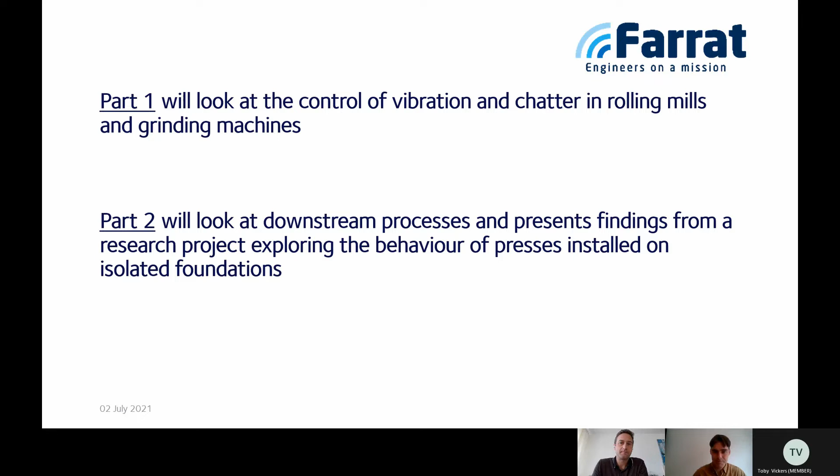So part one, control of vibration and chatter in rolling mills and grinding machines. First of all, what is chatter?

Chatter is marks on the metal strip that comes out of rolling mills. This can be visible to the naked eye, but it can also be invisible, and it can show up further down the process, causing issues with quality, especially at paint application. This can happen in industries such as automotive and aerospace, but also in canning, and it can result in rejection of strip and loss of profits.

Some mill vibrations can also cause gauge variation on the strip. This is where there's varying thickness along the strip, and this can also cause quality issues and rejections. We'll talk a little bit more later on about gauge variation.

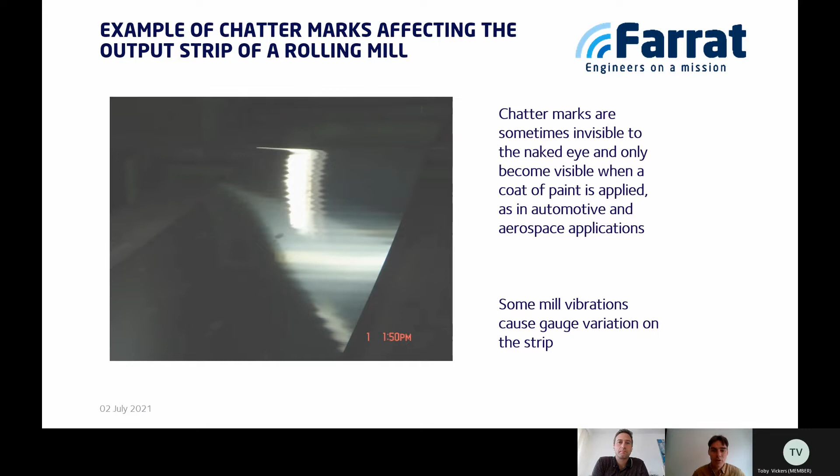There's essentially two vibration modes which can affect the mill: third octave resonance and fifth octave resonance. Third octave resonance is audible, and this can cause gauge variation on the strip. This is when the work rolls move into and out of the strip, causing a varying thickness. We call this gauge variation, and this causes quality issues and ultimately rejection of the roll.

And then you have fifth octave resonance. This causes backup roll marking, which can later print onto the strip. This is when work rolls move into and out of the backup rolls, causing marking or chatter on the backup rolls. This chatter then prints down through the work rolls onto the strip, causing chatter on the strip.

The question then is, what's the difference between the two modes? What causes them, and what can we do to resolve them? We'll talk about that now.

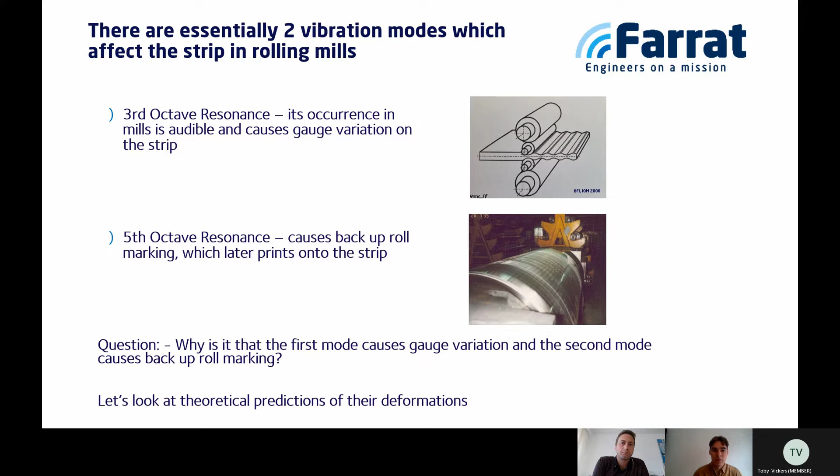You then have the first mode of vibration. This happens at around 70 Hertz. In this mode, all of the rolls, the backup and the work rolls, are moving in sync, up and down together at the same time. So there is movement of the rolls, but there's no relative movement. This means the backup rolls aren't being pressed into, and there's no relative movement between the work rolls either, so there's no gauge variation on the strip. So again, this mode's fine.

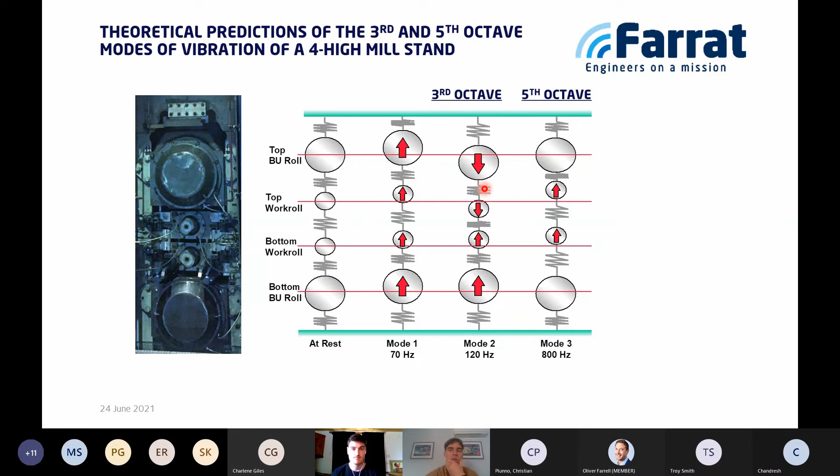So as we said, third octave mode of vibration causes gauge variation, because the work rolls are moving in antiphase, creating a thickness difference at different parts along the strip as it moves in and out. The frequency of the third octave mode is largely independent of speed - it's a structural issue, usually around 120 or 140 Hertz. Because it's a structural issue, it's also not usually related to forced vibrations - not a result of a gear or bearing, but a structural problem with the machine that's excited whenever it's running.

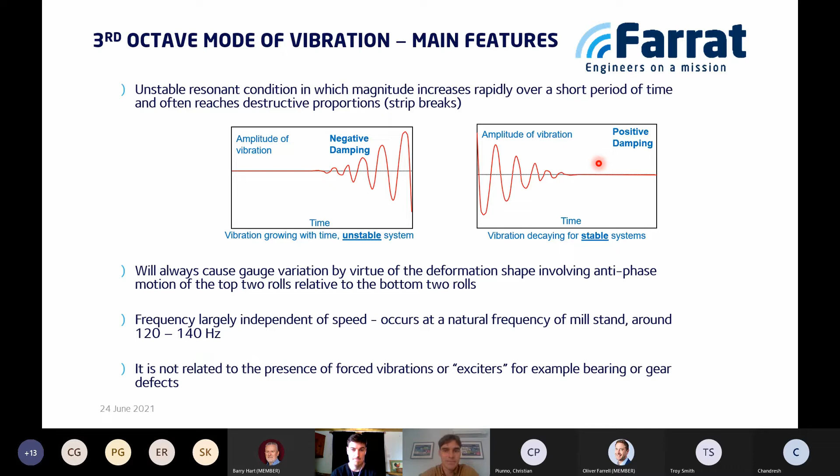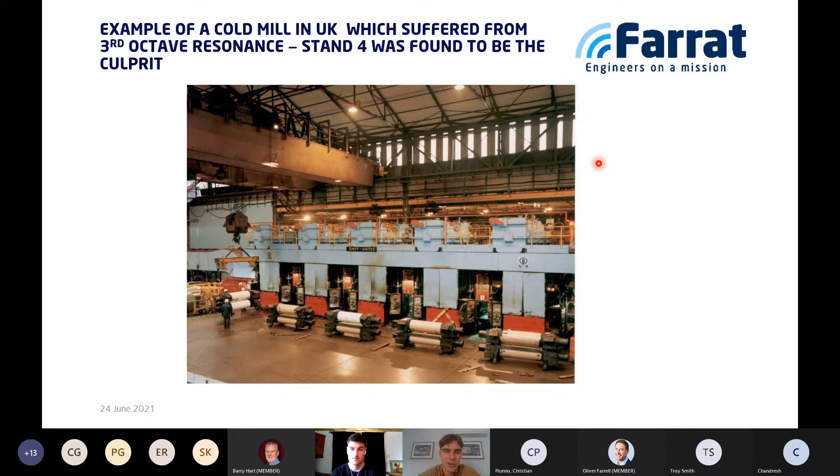An example of this is a cold mill in the UK. This was a 5-stand mill, and on stand number 4 there was a structural weakness. There was movement in the rolls and in the chocks, and this was causing gauge variation on the strip.

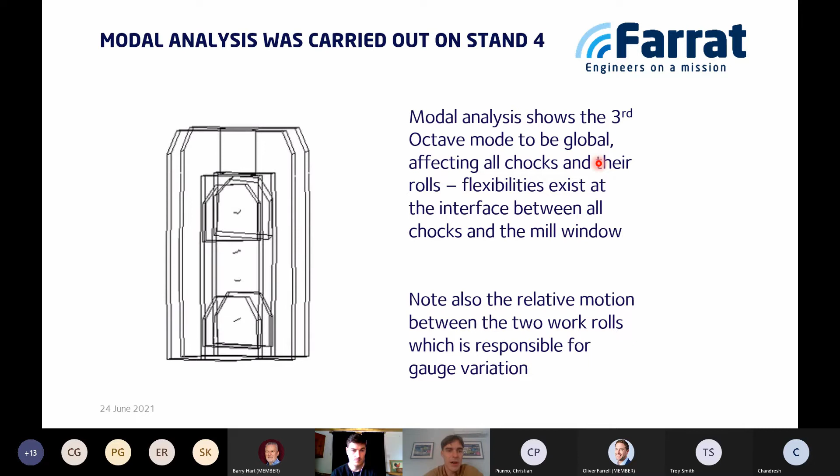We've got an animation here on the left-hand side. You can see the work rolls, which are the two lines in the center, and the backup rolls, the two lines at the top. They're moving together in and out, you could say panting. As this happens, the strip passes through and the thickness varies along it. You can also see there's flexibility between the chock and the mill window, which is what's causing the movement. This was carried out using modal analysis, which is what allowed us to view this animation - I'll talk more later about what modal analysis is and how it's carried out. But we can see clearly from this representation that there's a lot of looseness in the machine.

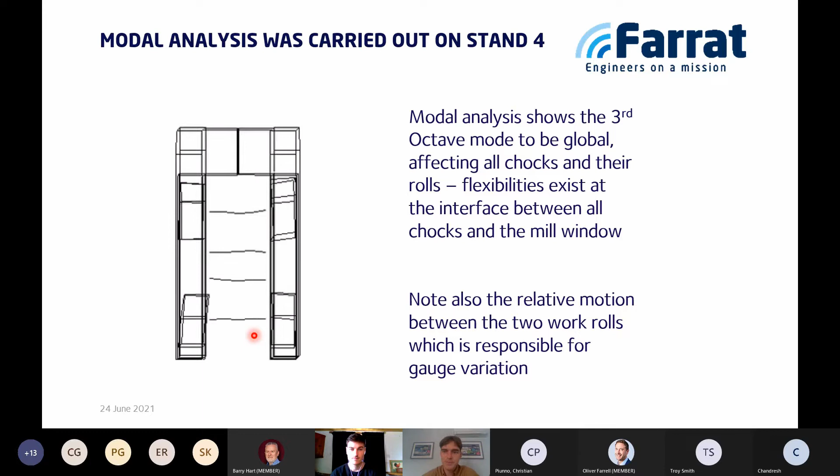Here's another example - a more localized third octave resonance. In this case, the bottom backup chock was moving around inside the mill frame. When this happens, it causes relative movement of the two sets of rolls, and again gauge variation in the strip. To fix this, the excess clearance levels had to be restored to their original specifications. We were able to identify this was happening through modal analysis, which I'll talk about in more detail later.

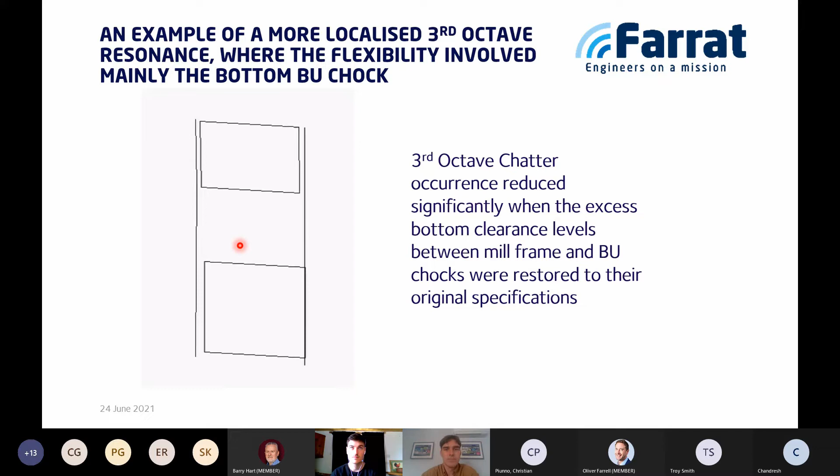So that's how we can identify third octave chatter. I'll talk now briefly about what can be done to solve it. The first thing is to use a vibration monitoring system for early detection of chatter and to automatically slow down the mill. With an accelerometer on the mill, you can measure vibration levels, and the operator can see this in real time and use these measurements to avoid speeds which excite the third octave resonance. As well as that, we can use modal analysis, which, as we just saw, allows us to see where there's looseness in the machine, excess tolerances, etc. If we know that, we can reduce clearances and add stiffness and damping to fix it.

Another thing we can do is add passive dampers. For example, a tuned mass damper could be added to the backup chocks - I'll show an example of that in the next slide - or it can also be added to the mill frame.

Process parameters can also affect the third octave resonance. For example, if there's not proper lubrication at the roll bite, the levels can be changed to get proper lubrication, and this should improve the damping characteristics of the machine.

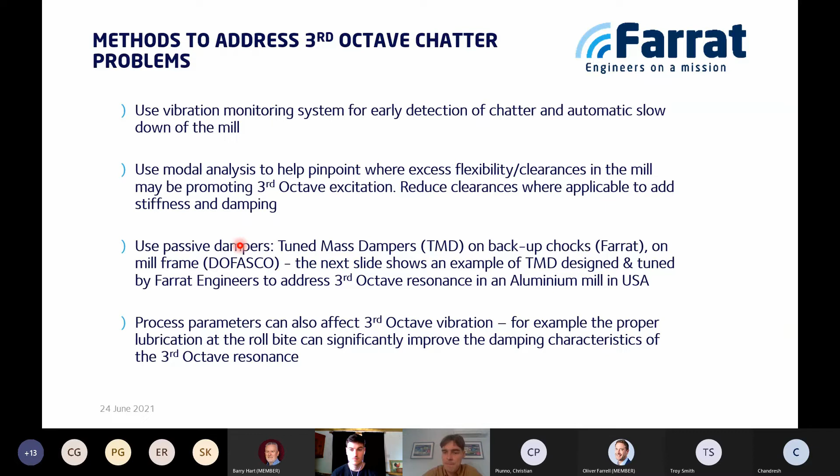So this is an example here. This is a tuned mass damper that's been fitted to a backup chock on stand 2 and stand 3 of a tandem mill. Once this was fitted, there was a significant improvement in the mill performance.

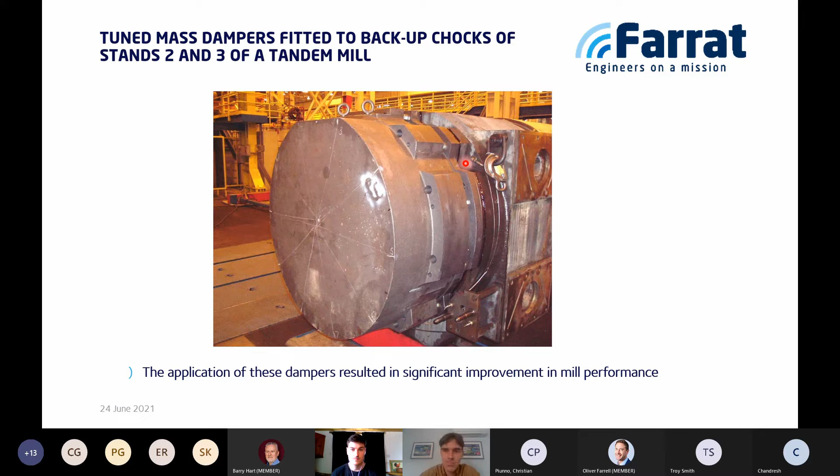So that was third octave resonance. I'll talk now a bit more about fifth octave resonance. As opposed to third octave resonance, which is unstable, fifth octave resonance is stable. This means the vibration magnitude remains constant for given operating conditions, but is amplified by the speed. So whenever the operating speed of the machine coincides with the fifth octave resonance, there's higher amplitude vibrations.

As we saw before, in this case, the backup rolls are inert, they don't move, but the work rolls move up and down in sync, causing marking on the backup rolls. This marking can mean the backup rolls need to be replaced much more quickly, so there's a reduced campaign duration. And if the marked backup rolls are left in the mill, it can cause chatter marks in the strip as it presses down through the work roll and onto the strip. This can lead to quality issues and can often lead to rejection of the strip by the customer.

Fifth octave vibration is always a result of exciters. That could be a gear, a bearing, a coupling, or it could be strip coming into the mill that's already been marked by a process upstream. The most common cause of fifth octave vibration is chatter on the rolls from the grinding machine, put on before it's actually got to the mill. I'll talk about that in more detail later on and about what can be done on the grinding machine to help mitigate this.

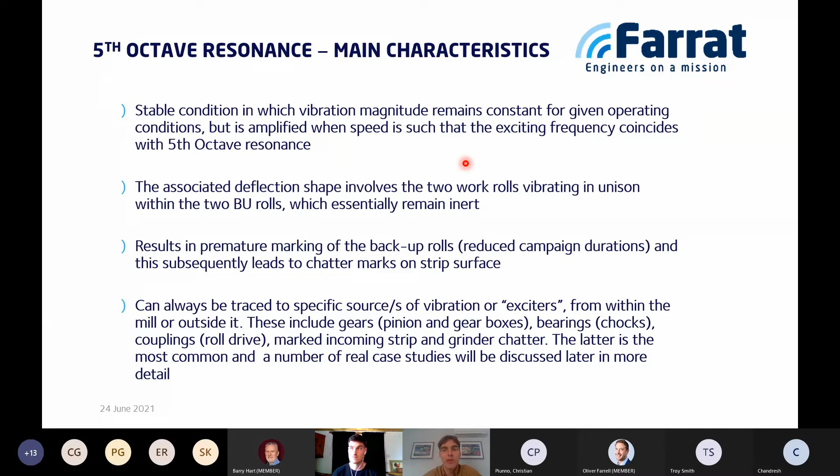So this is an example of fifth octave resonance. In this diagram, you can see the solid lines are the initial position of the mill. Here are the chocks for the backup rolls, the work rolls. Here's the backup rolls themselves, and in the center, you've got the work rolls. The solid lines represent the original position, and the dashed lines represent the deformed shape.

You can see that for the backup rolls, there's very little difference between the dashed lines and the solid line. In fact, they're pretty much in the same place. But for the work rolls, the dashed line has moved significantly up from the solid line originally. So the work rolls are both moving, the backup rolls are staying still. The work rolls are moving up to and out of both of the rolls, causing marking on the backup rolls. You can see actually on the bottom work roll, there's slightly more movement than on the top work roll. However, they're both still moving, so it's still going to cause issues on the backup rolls.

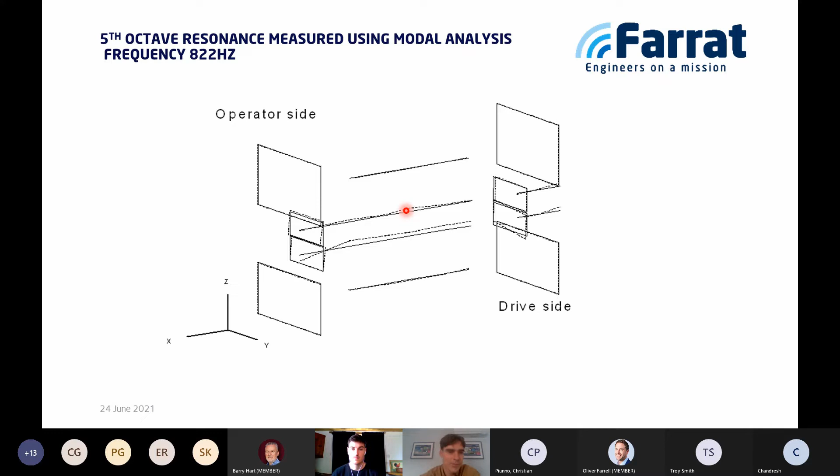We've got an animation here of this as well. You can see here that the work rolls are moving quite significantly. The work roll chocks are moving slightly as well, and they're moving up to, in and out of both of the backup rolls.

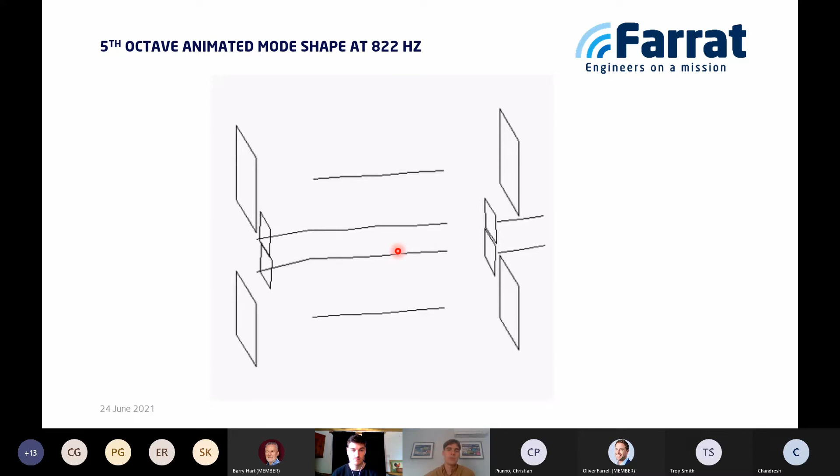So that's fifth octave vibration. That's what it does, that's how it works. How do we solve it? We can use vibration analysis techniques to identify the sources of forced vibration.

What this means is we can carry out instrumented hammer tests on the mill to get a frequency spectrum. We can use accelerometers on the mill while it's operating to see where the high amplitude vibrations are. So if we can see a high amplitude vibration at a certain frequency, we can figure out maybe this is due to a bearing, or maybe it's related to a coupling, or maybe it's related to a gear. And then once we know what the source is, or have an idea what the source is, we can replace it, or we can run at speeds that don't excite that source.

There's a number of different things we can do once we've identified what the source of the forced vibration is.

We can also use modal analysis to identify where excess clearances or lack of stiffness may be making the resonant behavior worse. I'll discuss in more detail later what modal analysis is, but it essentially allows us to see the shape of the machine as it's deforming, so where there's looseness, where things could be tighter, where there's excess clearances.

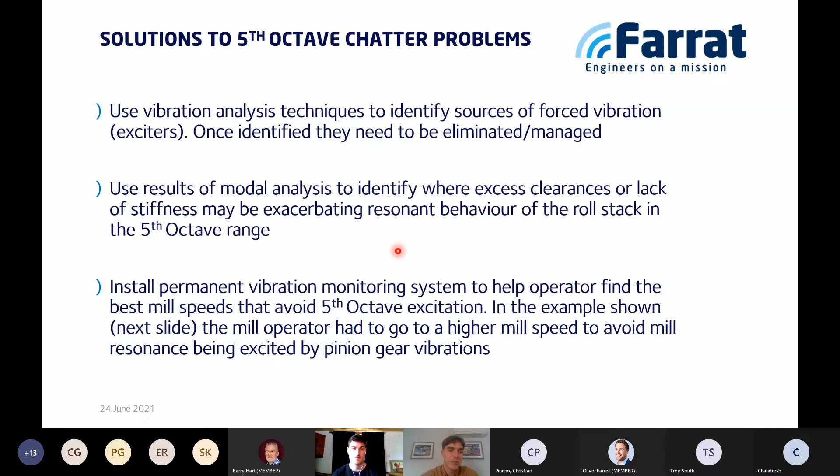Another thing we could do is install a permanent vibration monitoring system. I'll discuss that in more detail now, but essentially it allows the operator to see the levels of vibration on the mill in real time. So if the mill is vibrating a lot, the operator can potentially change the speeds in order to move away from those resonances and reduce the vibration.

This is an example of a vibration monitoring system installed in a mill pulpit. The mill operator can sit here and look at the screen, and it presents vibration levels against the speeds, and the mill operator can make decisions based on that.

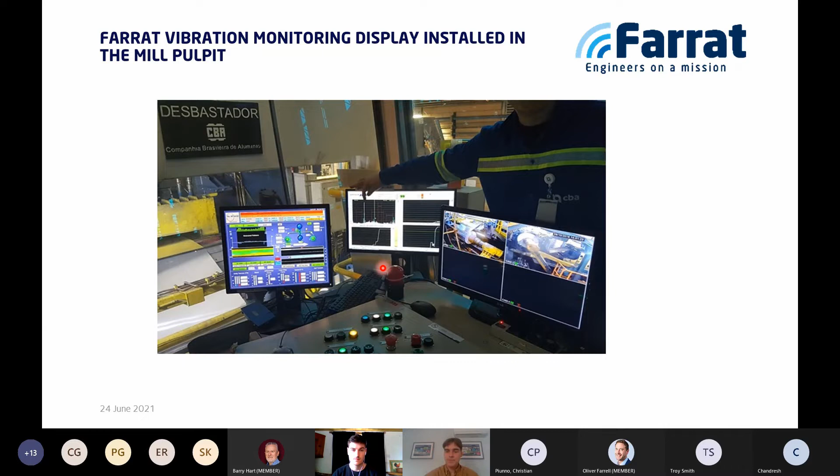I'll go through an example of one such case. This is a display that the mill operator would see when looking at the vibration analysis system. In the top left, you can see this window - this is the vibration spectrum from 0 to 1000 Hertz, and the operator can see at what frequencies there are high amplitude vibrations.

On the right-hand side, we've got the readings for the 5th octave, from 380 to 580 Hertz against time on the x-axis. And on the bottom left, you've got the speeds against time.

The mill operator initially starts with a speed of around 400 meters per minute, and you can see here in real time that that's causing very high amplitude vibrations, above the alarm level. So the mill operator tried to increase the speed to move away from resonance, up to 515 meters per minute. But you can see in the vibration window that there's still high amplitude vibrations, so this change hasn't effectively moved it away from the resonance yet.

Then he's increased the speed again finally to just over 600 meters per minute, and you can see here in real time that the vibration levels have dropped significantly. This is interesting because the speed's actually increased, so the mill is more productive, but the vibration levels have dropped. So the quality of the sheet should be improved as well. This is all made possible because the mill operator can see this screen in real time as the mill is being operated.

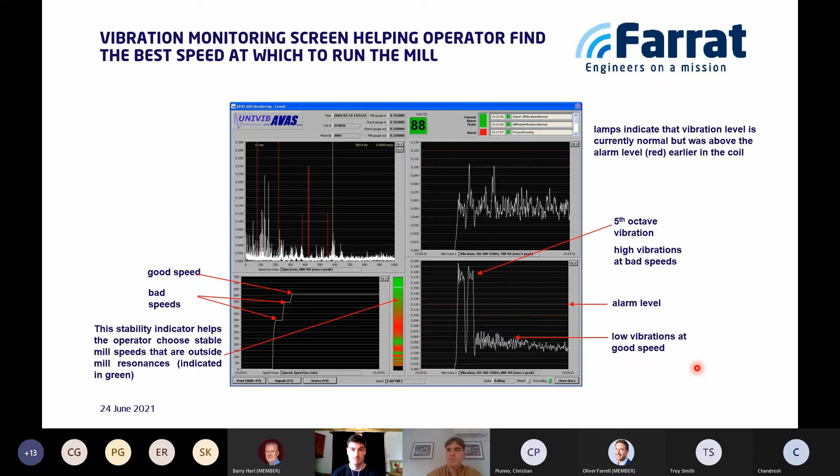As we mentioned before, probably the main cause of mill fifth octave vibration is grinding chatter problems - rolls that have come from the grinder with chatter on them into the mill and are exciting the mill. So what can we do to solve grinder chatter?

There are two types of vibration caused by a grinding machine. You have forced vibrations, which are defects in rotating equipment essentially - that could be bearings, gears, things like that. And then you've got the chatter vibration or resonant vibration. This is the more serious of the two types because it's a result of a structural weakness in the machine, meaning structural changes need to be made to fix it. Whereas with a forced vibration, it can often just be replacing one component.

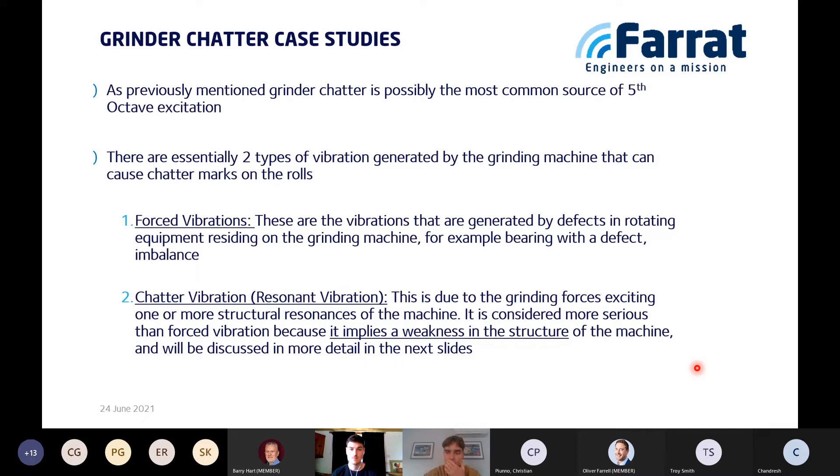These are some rolls coming from the grinder. The interesting thing about this photo is that both of these rolls actually have chatter on them, but you can only see it on one of them. You can see in this first roll that there are quite clear horizontal chatter lines running along the length of the roll. The image on the right-hand side, there is chatter there, but it's invisible to the naked eye, so we can't see it. I'll talk more later about what we can do with invisible chatter and how it can be identified when you can't just see it, because this can cause problems in the mill even though you can't see it with the naked eye.

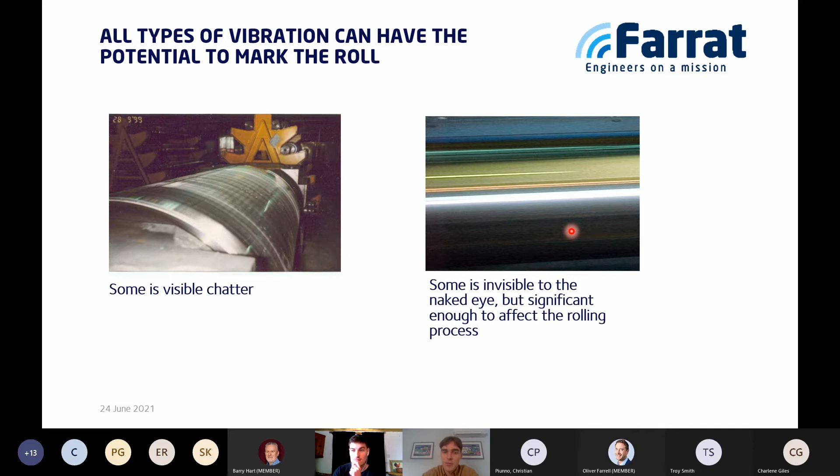Investigating structural problems in grinding machines is done through modal analysis. We talked earlier about modal analysis and what it can show us, so I'll explain now how it works.

We use an instrumented shaker or a hammer to excite the machine, and then using accelerometers, we measure resonant frequencies of the machine. We would then create a 3D drawing of the machine using dedicated modal analysis software, and automatically read in the measurements from the accelerometer and the instrumented hammer into the software, which creates an animation showing us where there's looseness in the machine and where there's deformation.

We can analyze this animation and use it to tell where we need to fix the machine, where we need to stiffen it, where we potentially need to add a tuned mass damper, things like that. It's a very powerful tool. I'll talk through some examples of that and what we did to fix it.

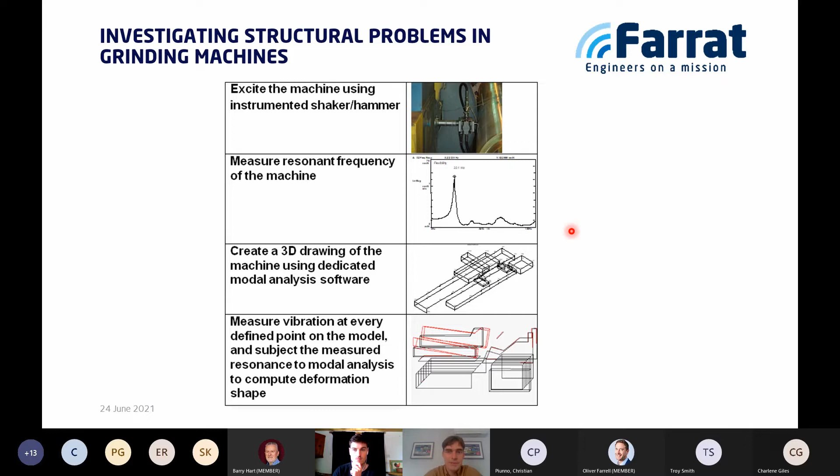In example 1, you can see the animation. On the left-hand side is the wheel head, with the wheel fixed rigidly to it. On the right-hand side are the stocks, and the roll sits in the stocks. There's quite a lot of movement between the wheel and the roll. This in-and-out movement can cause chatter on the roll, and it did. That chatter is then passed on into the mill.

By performing modal analysis, we were able to see what the issue was. The wheel head and the headstock were both moving because they were rigidly fixed to the bed, which itself was deforming, as you can see in the video. The bed was moving up and down because it wasn't rigidly fixed to the foundation. There was too much looseness.

To solve this, additional bolts were added to the bed. It was tightened to the foundation, and the stiffness was increased. That meant the bed moved around less. Because the bed was moving around less, the wheel head and headstock, which were rigidly fixed to it, were also moving around less, and there was less relative movement between the wheel and the roll.

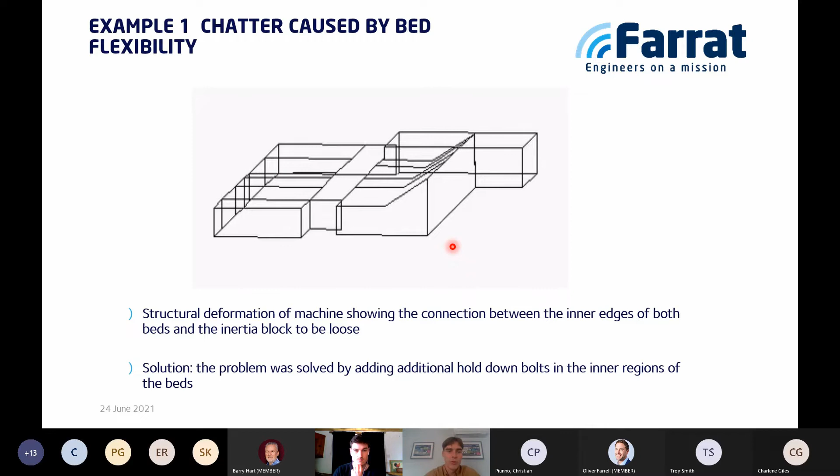This is another example. In this case, the wheel head was moving around on the slide. You can see very clearly it's moving up and down. There should be some movement between the wheel head and the slide, but nowhere near this much. The wheel head's moving in and out, the wheel's moving in and out in the roll, and that causes marking on the roll and chatter.

In this case, there was a looseness in the interface between the wheel head and the slide, and this could be fixed by stiffening the interface. That would cause less movement between the wheel head and its slide, and therefore less movement between the wheel and the roll. We were able to identify this using modal analysis.

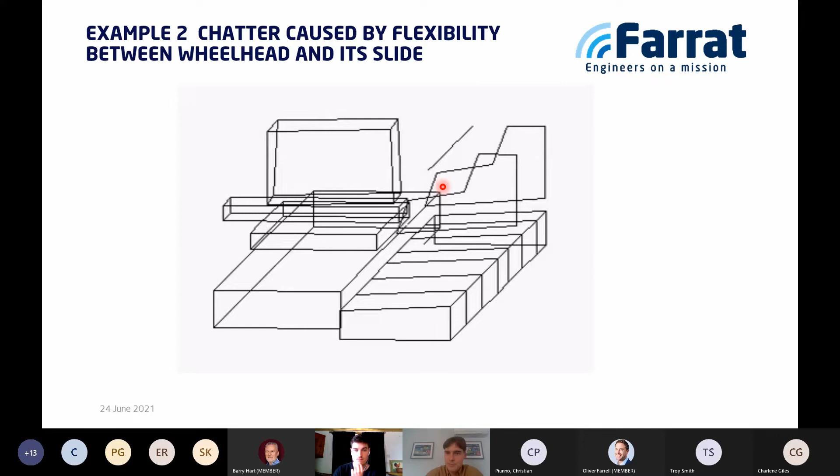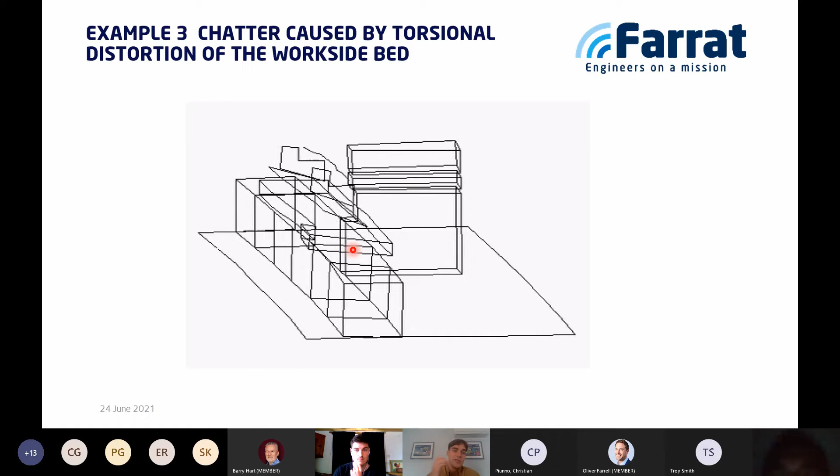The third example here is from the other side view. In this case, there was torsional distortion of the workside bed. You can see in this animation that the bed's twisting. This meant that the roll was also moving around a lot relative to the wheel, again causing chatter on the roll.

We needed to stiffen the workside bed structure, and that was done by adding machine mounts under the end of the work roll. So modal analysis allowed us to see where the problem was very easily, and then we were able to use an easy solution to fix what was quite a big problem.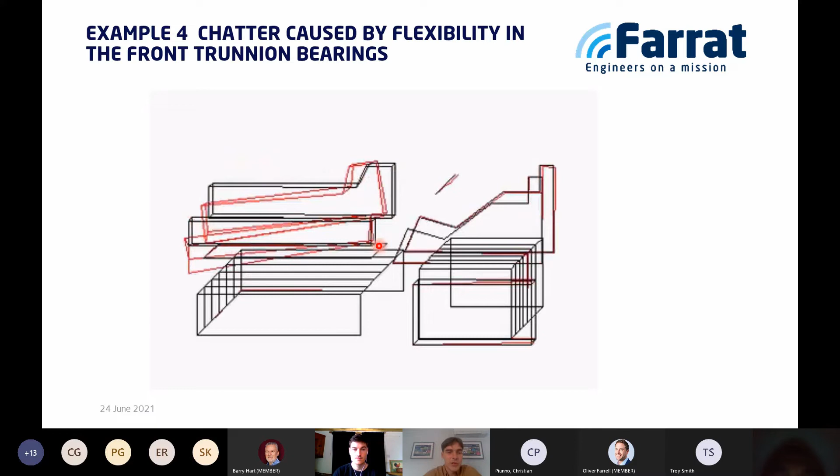In an example like this, what we can do is use a tuned mass damper at the back here to reduce the amplitude of the vibrations, stop the wheel head moving about so much, and therefore stop the chatter on the rolls. I'll show an example of that now.

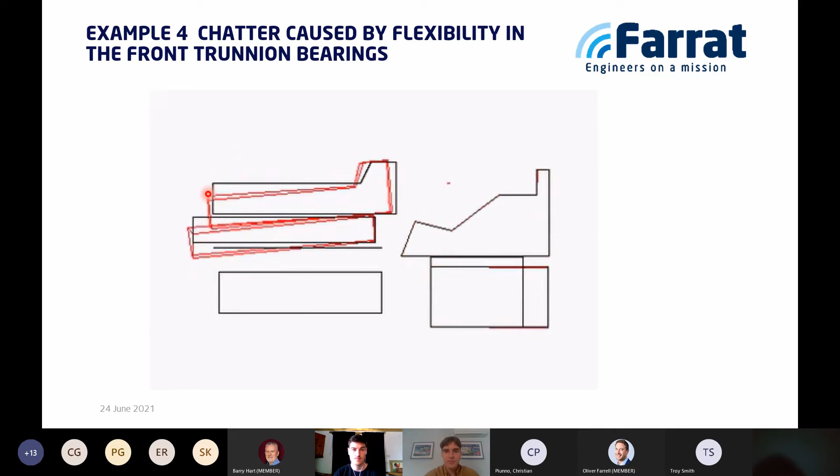In this case, this is a tuned mass damper that was fitted at the back of the wheel head. This reduced the amplitude of the vibrations and added damping to the overall system, meaning there was much less relative movement between the wheel and the roll. That was a relatively easy fix that we knew to do because of modal analysis.

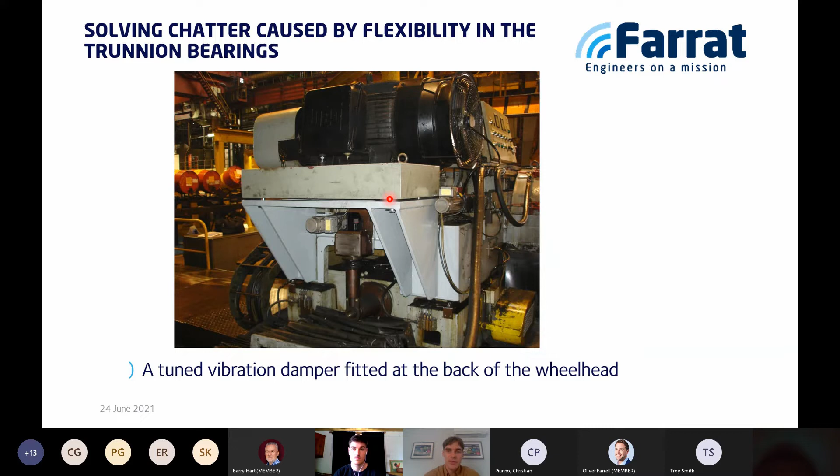So in order to verify that this worked, we wanted to compare the frequency spectrum before and after the tuned mass damper was installed. This red line represents the system before, the resonance before the damper was installed. We've got a very sharp peak here at 22 Hertz, which shows us there's low damping in the system. Once the damper was added, you can see that peak has been reduced significantly, completely smoothed out, meaning good damping properties and the vibration is gone. We completely eradicated the problem that was caused by the looseness in the machine by adding the tuned mass damper.

You can see here the amplitude of the vibration at resonance reduced from around 55 or 60 all the way down. So there was about a 5-fold reduction there, and that completely solved the issue by adding the tuned mass damper.

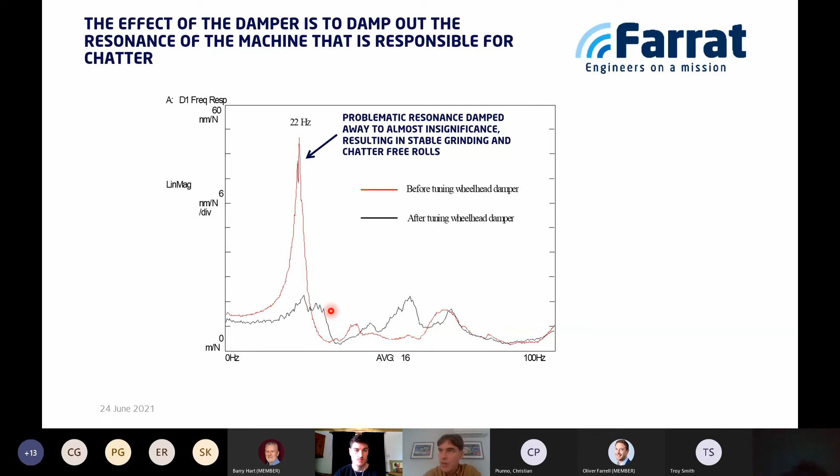As I mentioned before, not all chatter is visible to the naked eye. Sometimes it is — you can look at the roll and see it very clearly, and the operator can tell. But sometimes it's completely invisible. You've got an example of this here on the left-hand side. This roll actually has chatter on it, but you would never be able to tell by looking at it.

Farrat have a system called Chatter Detect that allows us to measure chatter on the roll using a capacitive sensor. It's a non-contact capacitive sensor, and the operator will turn the roll slowly around with the sensor placed near it. The sensor measures the varying depths of the roll and feeds those readings into the Chatter Detect software, which gives the grinder operator information about the roll and its chatter properties.

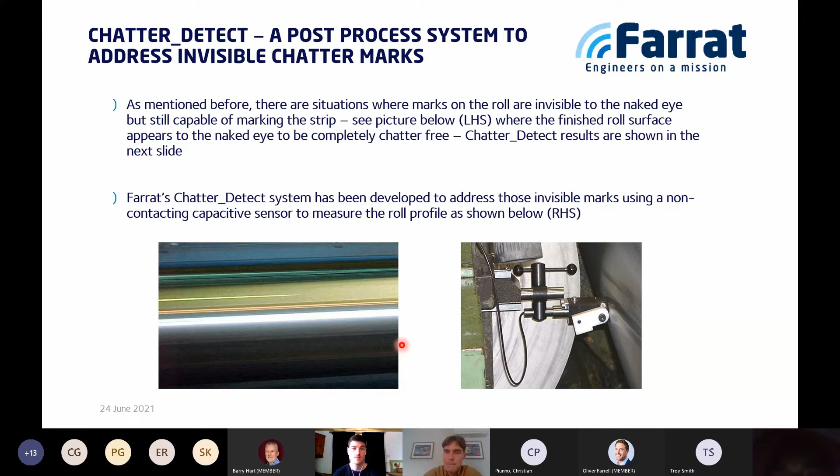This is an example of a display given to the grinder operator. In the top window, this is the circumference of the roll represented around the x-axis — flattened out so we can easily analyze it. The waviness represents the different depths of the roll as the capacitive sensor reads it in. Chatter Detect works by separating the circumference into 10 sections, taking readings for each, and splitting them into these bars here.

The operator sets a threshold initially for the depth of the markings on the roll. If the marking readings for each section exceed that threshold, they come up in red — you can see 4 bars here in red, all exceeding the depth of the threshold. As well as that, it also gives us the pitch. We can see there's a chatter pitch of 1.04 for section 1, which exceeds the threshold depth of the marking.

You then have 0.92, 0.88, and 0.87 for sections 4, 5, and 6. These green bars have all passed — the depth of the markings was less than the threshold. But because we've got 4 sections exceeding the threshold, the grinder operator would know that this roll has chatter on it, and what they would usually do is refinish the roll to remove it.

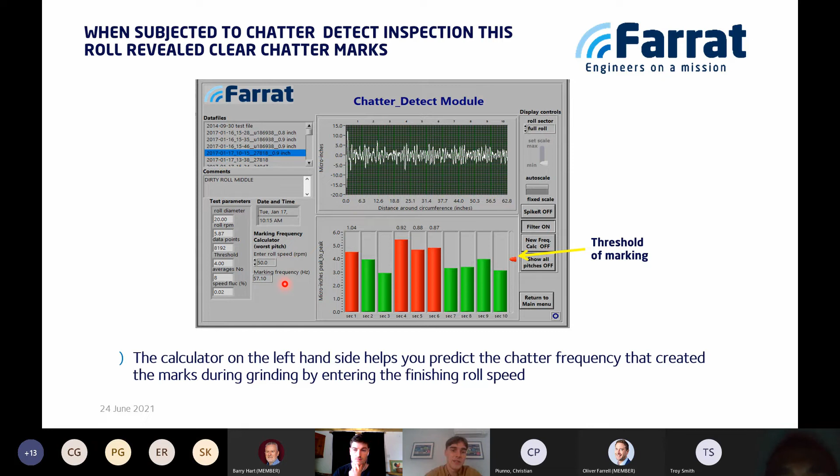So here we have a case that would pass. You can see the line is much smoother, which is what we want — it's nearly flat. All 10 of the sections are green, meaning they've all passed the threshold set by the grinder operator. So the grinder can look at this window and know he can send the roll to the mill with confidence that there's no chatter on it, and it's not going to cause any problems in the mill.

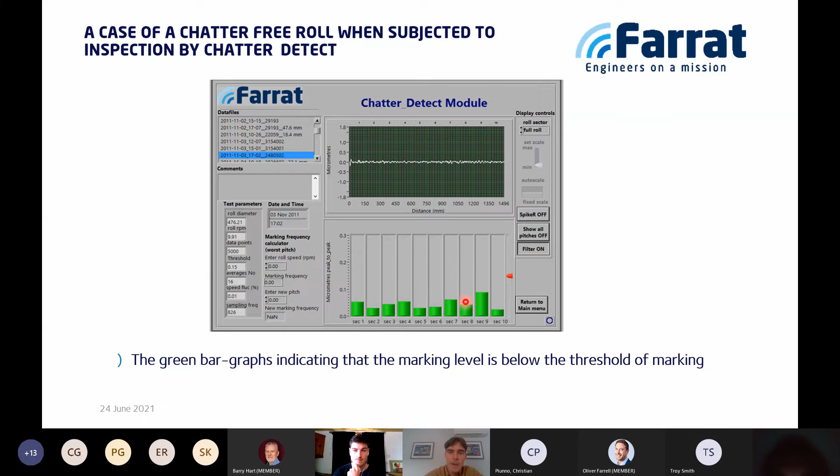So those were all post-process ways of analyzing the grinding machine. But Chatter Detect also has some in-process vibration monitoring tools, which allow the grinder to see what's going on as the roll is being ground.

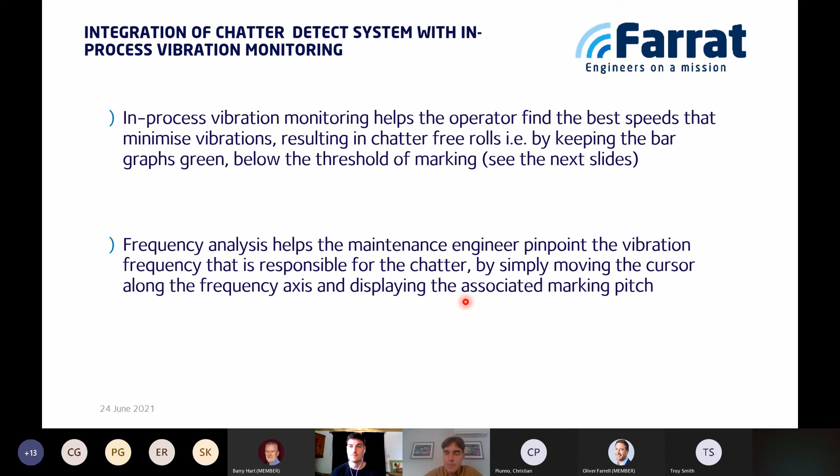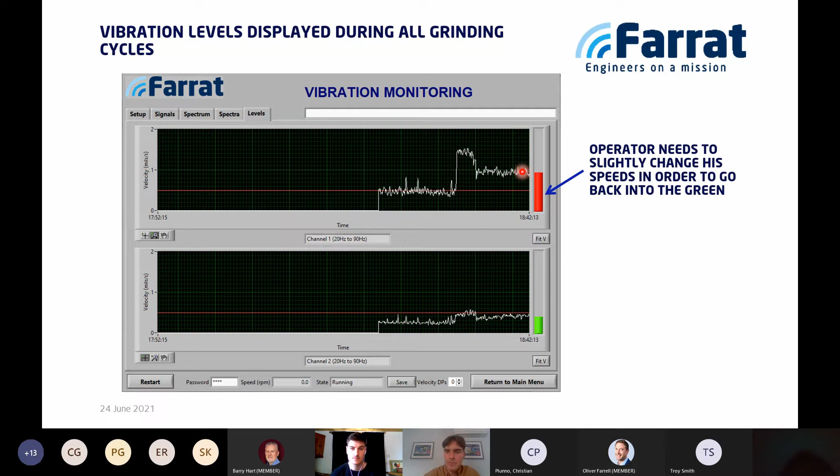So if Chatter Detect's telling the grinding operator that they might expect to see, for example, 0.58 inches due to the 75 Hertz vibration, if the grinder then runs Chatter Detect and it measures those chatter marks, he can know that this frequency is what was causing those chatter marks, and he can potentially do things to prevent that frequency from causing the marks again and mitigate the issue.

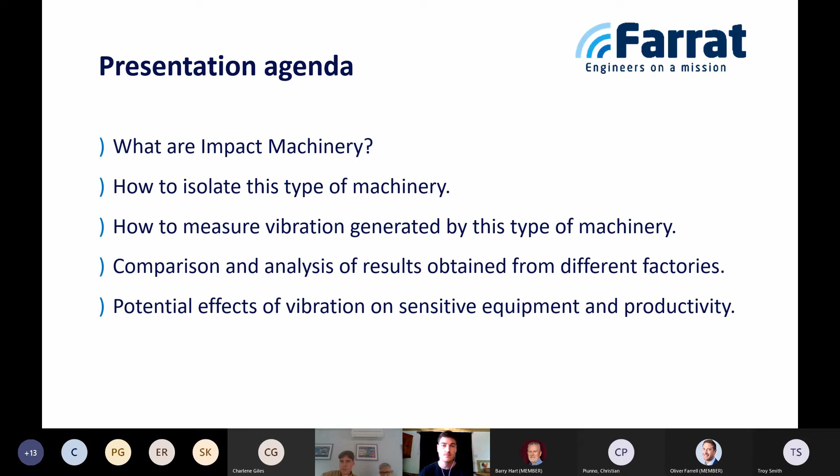So impact machinery is described as machinery that generates an impact, such as high force or shock, over a very short period of time. This type of force is typically generated by industrial machines, such as forges or presses. We'll focus on cupper press in this presentation, which are used to produce aluminium cans. They use rolls of aluminium sheeting, hopefully of perfect quality thanks to Youssef and Jacob's work.

And they perform two operations: they firstly punch out simple discs and then form them into cylindrical cups. These actions generate vertical excitations that can be considered as shocks, repeated at frequencies determined by the speed of the machine. And the shocks produced can then alter the proper functioning of the installation, systems and components, eventually reducing the machine productivity, damage the building, and generate waves and noises propagating in the environment.

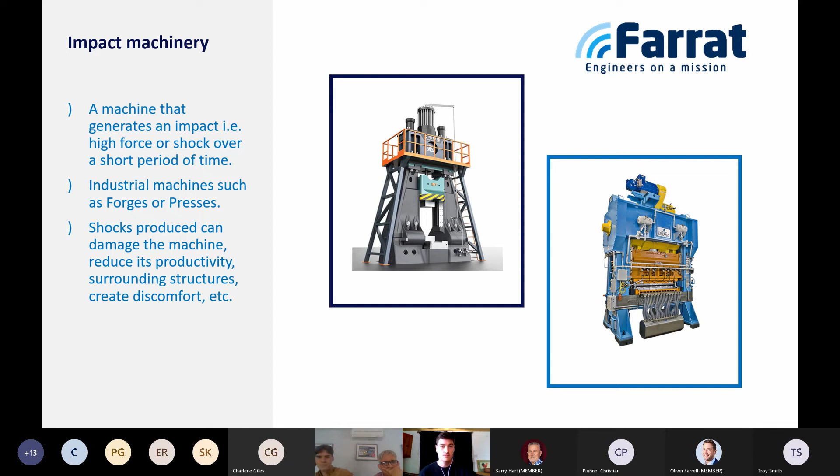Considering all these effects, it's therefore necessary to minimize the transmission of the shock forces and reduce the vibration level to the surrounding environment. And this is where Farrat expertise plays a critical role in the isolation of this type of machinery by designing and supplying bespoke anti-vibration systems.

So the first thing that comes to mind is to use resilient elements that will act as isolators. Isolators are flexible elements used to attenuate the transmission of shock or vibration from the equipment to the structure. The isolator selection is done based on different factors, such as the mass and speed of the machine, level of isolation required, etc. And what's usually encouraged in these types of applications is to add mass to the system.

For this, a concrete inertial block is poured on top of the isolators so they can achieve a certain level of compression, improving their performance in terms of shock absorption. The inertial block also provides more stability to the structure. It reduces the rocking of the machine, and as a result of increased stiffness and lower center of gravity, it maintains alignment during changes in static and dynamic loads.

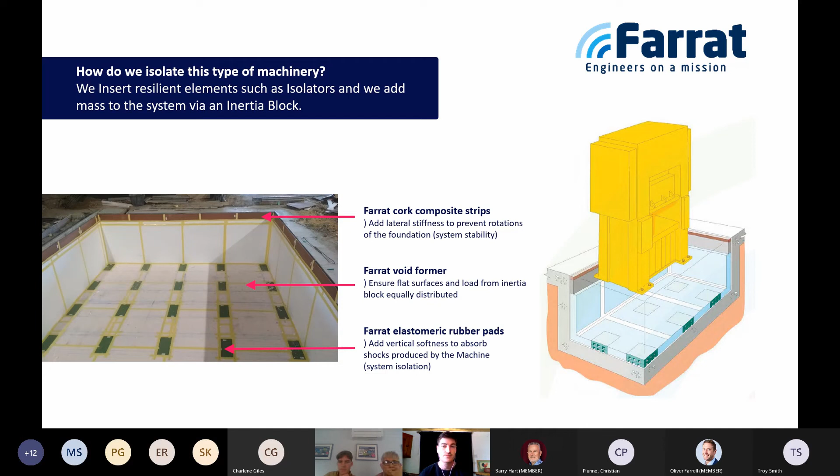produced by the machine to isolate the system. As part of Farrat's research program, different vibration surveys were undertaken in some factories to determine the performance of isolated foundations supporting cupper press systems.

This can be explained by the isolation system supplied by a competitor, which might have gone for a wrong design or product, but also some bridging connections have been observed, with one column in particular rigidly bolted to both the inertia block and the surrounding factory floor, helping vibration get transferred around.

This specific example will be developed in one of the next screens, showing how the poor isolation performance has affected the sensitive machine positioned nearby within the factory.

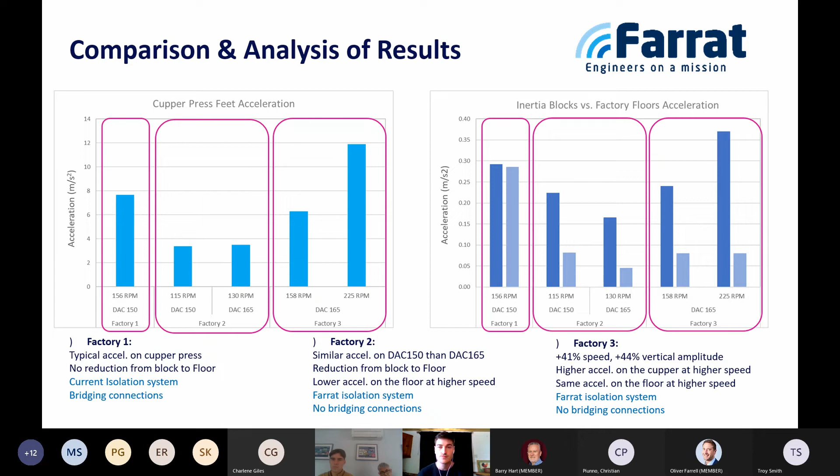Another real-world case study can also be presented to highlight the performance of Farrat isolated foundation designs. In this instance, Canning Factory was having issues with a cupper press generating excessive vibrations that could be perceived by neighboring buildings placed at a distance of 70 meters from the machine.

It was reported that the surrounding buildings stopped perceiving vibrations generated by the machine after installation of this product. However, at the same time, it was also observed that the springs, together with the foundation and machine installed on them, started to present unexpected high movement. As a result, premature wear and increased spoilage were caused, reducing the overall productivity of the plant.

Farrat was asked to provide a solution that would reduce the excessive movement of the press while maintaining a quiet environment for the neighboring buildings. The challenge was to stiffen the overall system while preventing excessive vibrations from being transferred around.

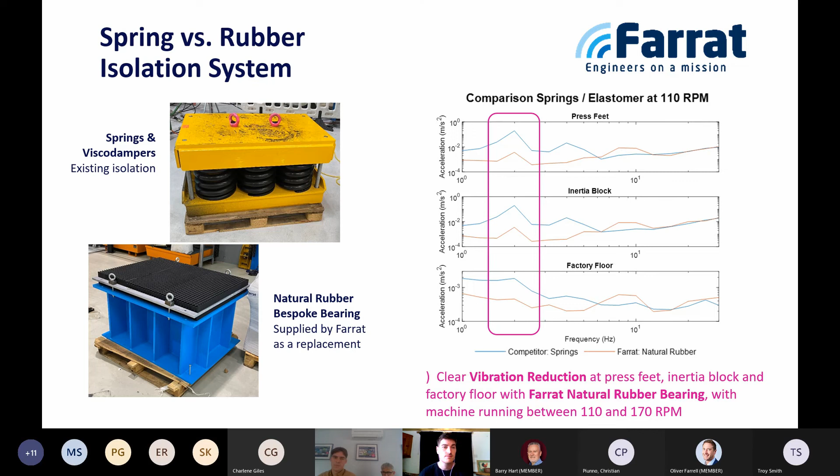Now that we've seen the impact of vibration from poorly isolated presses, let's focus on one particular example from Factory 1, which highlights one of the potential consequences excessive vibration transmission can create.

A direct laser exposure system, using a direct laser engraving method, is located in an office close to the production lines of Factory 1, and 30 meters away from the press described previously. This machine is used to produce the masks needed to decorate the various types of cans produced within this factory, so it requires a very high level of precision and stability.

In order to determine the influence of the press, we've measured the vibrations on the printer in three different directions while the machine was on and off.

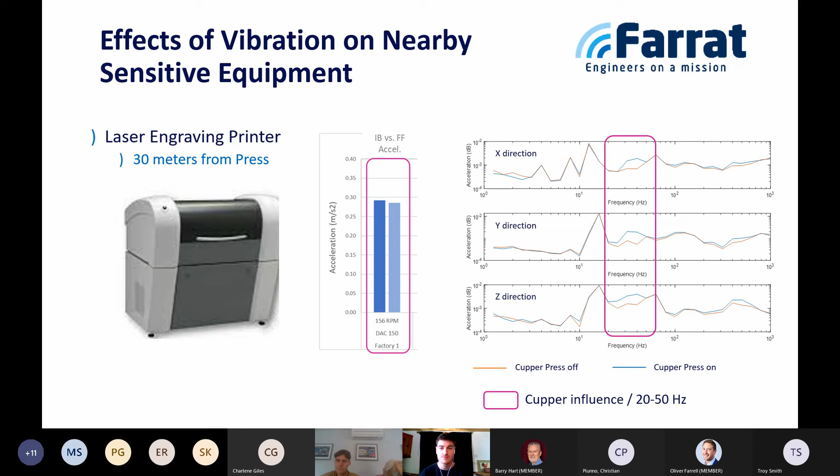In conclusion, we've seen that impact machinery produces shocks, generating a huge amount of energy in a very short period of time. This energy has to be absorbed by means of an interface between the machine and the factory floor, to avoid or at least reduce the transmission of excessive levels of vibration to the surroundings.

A typical way to isolate this type of machine is to insert an anti-vibration system below, made of an inertia block supported by isolators. The measurements performed on different presses have highlighted the very important isolation performance Farrat anti-vibration systems can provide to the industry.

With overall vibration reductions of 99% from the machines to the floors, the results also showed these performances were even improved with increased machine speeds, which has now become crucial considering the very high cadences and production rate required by the industry.

Finally, two examples have been presented showing the importance of properly isolating impact machinery. By doing so, effects on nearby sensitive machinery are highly reduced, allowing a freer positioning of the various machines in factories.

Appropriate anti-vibration system design is also required, since we've proven that industrial machinery subject to lower vibration will increase its productivity. Lastly, it's worth mentioning that vibration reduction will also reduce risk to the health and safety of workers, usually exposed to high levels of whole body vibration.